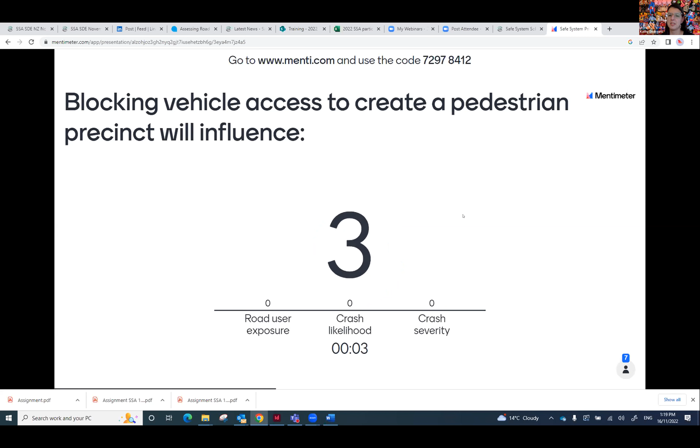Again the majority got that one. All right, we're just going to keep powering through - question 3. Blocking vehicle access to create a pedestrian precinct will influence - is it road user exposure, crash likelihood, or crash severity? Exposure - good, good, looks like we've got our exposure, likelihood, severity sorted, Ken, which is good.

It's pleasing. The safe system speed for vulnerable road users, people who walk, cycle or motorcycle, is less than what?

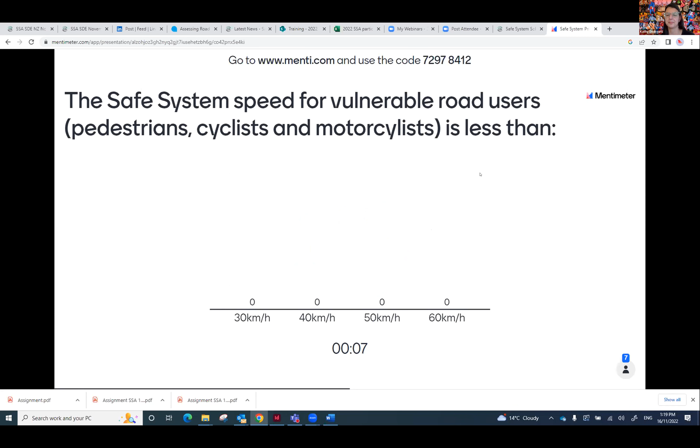Five considerations when evaluating the safety for motorcyclists include sight, surface, signs, strike, and which other S? Very good, very good, that is correct.

Last question, so this is it. The speed environment influences a crash's - is it likelihood, severity, exposure, likelihood and severity, or exposure, likelihood and severity? Good question. Interesting - severity, was it a trick question? Maybe it was a trick question.

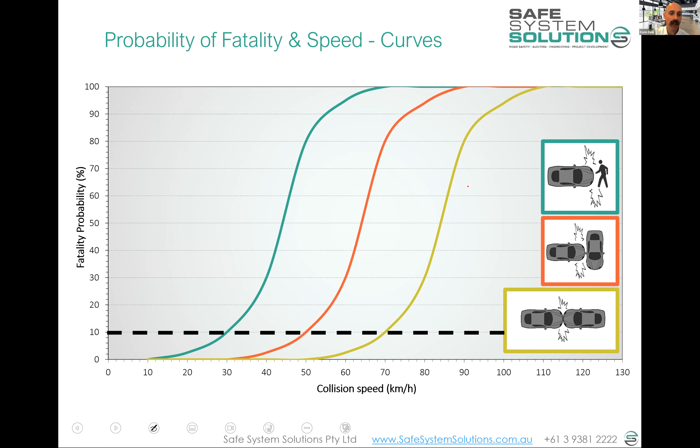I showed this to all the groups. With some I dwelled on it a little, and with others I moved past it, saying we'll cover this off in module 4 when you get into safe system assessing. That's now, so we'd better cover it.

So what we've got here is this idea that we've got a vehicle's speed, and then all these different crash types that could happen. They're going to be more or less severe depending on the speed and which crash type it is. In the safe system assessment, we need to give it a score between 0 and 4.

So we can start to think: if a car hits a cyclist at 40 kilometers per hour — it's a different color there because I'm going red onto red — we know we're in a fairly serious range, and a score of around 3 is applicable. If it happens at 80 kilometers per hour, we know that's very much in the 4, very bad category. If it happens at around 20, we're in a much better position — not absolutely free of risk, but much better. You can see that for a number of crash types.

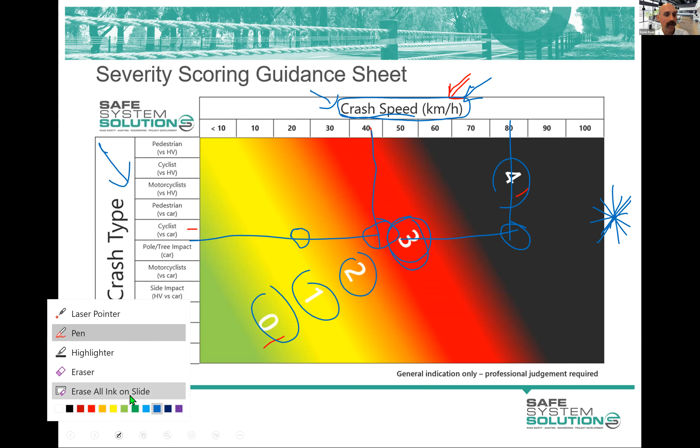Kathy asks: are we looking at cyclist speed or car speed? Great question. So this is all based on the car speed, or the speed of the bullet vehicle, if that makes sense.

I don't think we've got anything in there where there'd be an odd bullet vehicle being the one that does the damage. It is the car speed in all of them, except for maybe head-ons when we're getting heavy vehicles versus cars - you've got to sort of do a delta V on that, so it depends on mass and the vehicle going back. But generally you're talking about operating speeds of the road for vehicles.

Good question, thank you. Give a prize to that person. I don't know. Okay.

So I think I can just dive straight into showing you how to do a safe system assessment. And like anything in life, isn't it, the best way to learn how to do it is to get out and have a go at one, and then see where you don't understand things, ask questions, and have a go at it. But I'll walk you through, and then we'll give you all the info you need.

Kathy, we did have a little poll, or we may not have a poll. I'm not sure. No poll. That's okay, no polls. Sorry about that. That's okay.

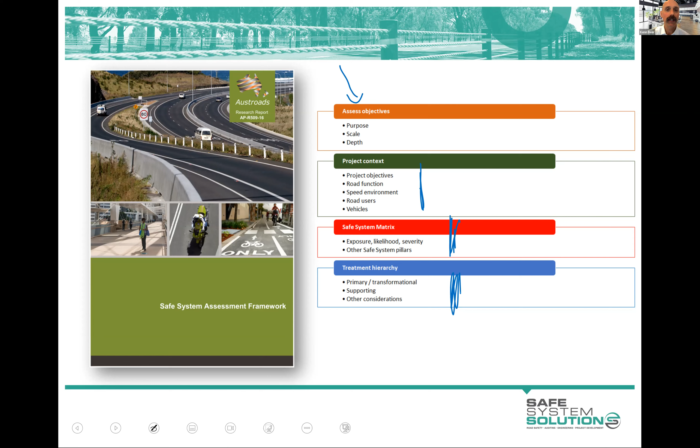So the two jurisdictions, South Australia and Victoria, put out supplementary guidelines that sit under the Austroads document, clarified a few things - it just didn't quite work in practice. They also set some requirements in those states for doing safe system assessments. That's now in your road safety plan, the requirement for safe system assessments to be done on infrastructure projects. So it's very much a genuine assessment technique that is used for infrastructure designs, development, planning of projects.

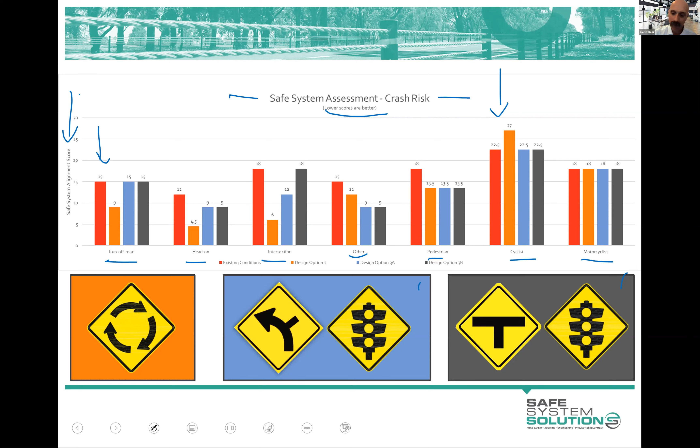So how do we get ourselves to this point? And that's what I'm going to spend the next bit of time going through. Well, first and foremost, you want to understand aspects of the project, which are going to help inform your scoring.

And Austroads put into the Safe System Assessment Framework these prompt questions. So if you're doing a safe system assessment, you start with these and you ask whoever the project team is - the designer or the project manager or whoever - you ask these questions around, well, why is this project happening? Are there specific issues that are being addressed? What's the traffic growth? Is it freight area?

Then you get into, well, what is the function of the road? What's the land use, speed limits, intersections that are going to stay, that exist, what's happening upstream, downstream. You could ask other questions to gain this context of what's going on. You'd be looking at movement and place assessments if they've been done, or understanding what the aspirations are of the area.

What's the speed environment? More questions around speed. What road users are present, or what road users are expected to be present - we've got elderly or children or the like - and what is the vehicle composition? We've got lots of heavy vehicles or motorcyclists or others.

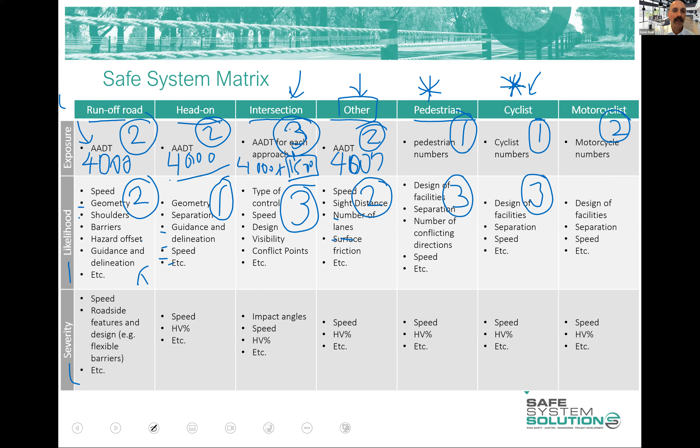And it's often the same for cyclists. They've got that sealed shoulder to work with, but there's no other facilities. Motorcyclists tend to be affected by all these different things within the others, and they're smaller and easier to miss by motorists at intersections, so they often end up becoming quite a highly scoring one.

So there we go, we've got now some scores for likelihood. Of course, if you're doing this properly, which you will be shortly, you're going to have to dot point some of the things I've been talking about before you get to actually putting a score down, to somewhat justify your score. Now, we do have a scoring reference sheet, a scoring fact sheet on likelihood, because it's a bit of a tricky one. You kind of have to think about it as relative likelihood - this intersection compared to other intersections, what are the characteristics that make it worse or better?

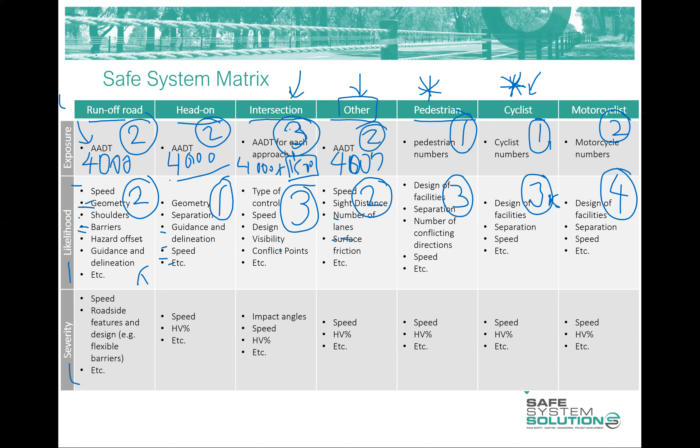Okay, let's get back into it. So we've now got scores down for exposure and for likelihood, and we've justified our likelihood scores with lots of dot points about what the physical infrastructure is and what's missing and all of those sorts of things. Then we go to severity - we say, okay, now put aside the chance of a crash and how many people are exposed to it, we're assuming a crash is now happening - how bad is it going to be?

What's the severity here? We say, okay, a vehicle is going to leave the road and it's going to hit something - what speed is that happening? That's going to be a big influence. What are the roadside features? Is it going to hit a barrier system? That's a crash.

So, is it going to be a flexible barrier? Is it going to be a rigid barrier? Are they going to hit a pole, a tree, or a culvert, or are they just going to roll over in the roadside? They're all going to have less severe outcomes.

And so this is where we look at, well, what are we saying for the severity of crashes? Let's go up to 4 again. I start at 4: should a crash occur, it is highly likely that it will result in a fatality or serious injury to any road user involved.

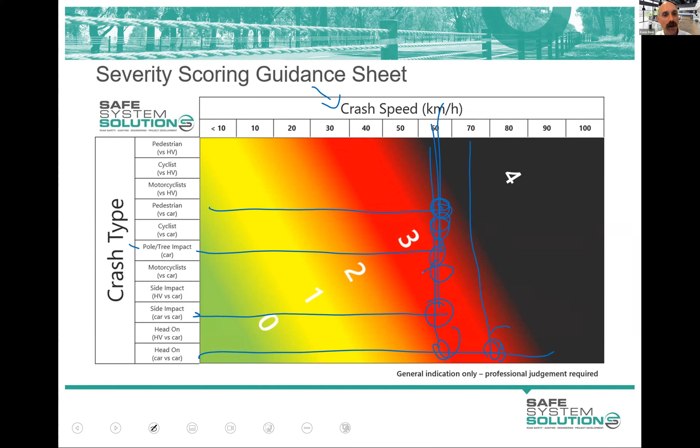And again, you're just using your judgment on these. Go to 3 on that.

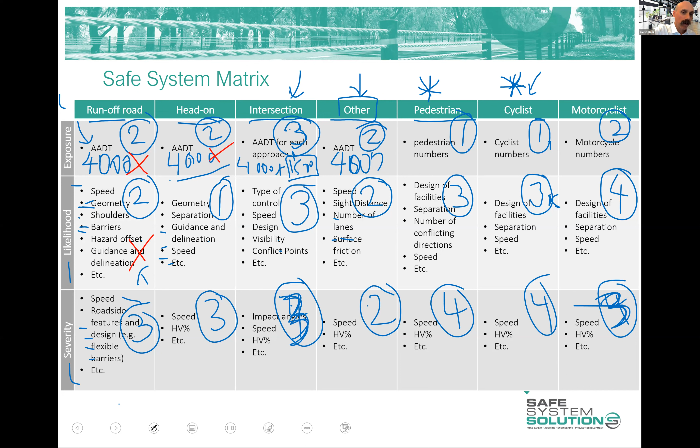Okay, so you've got to this point where you've put all these numbers in, and now you're going to take those numbers and multiply them. So you multiply down, right? So we've got 12, and then we've got 6 and 27. And you can see there, you're immediately starting to see where your risk comes out. What are we at?

Okay, so that immediately helps you. What you want to do is get a total score, so you add these up and you get a total score out of 448. Okay, Kathy, I'll pause there and see if there's any questions.

Yeah, I think Blair might have his hand up. Thanks, I thought it would be easier to verbally articulate what I was trying to ask rather than type a question. When you're looking at the heavy vehicle percentage, you predominantly use speed to pick your numbers on that severity. For instance, that pedestrian one was borderline 3 or 4, but if you have an awareness that this is used more by heavy vehicles, or there's other influence that would tip you into a 4, is that how you would use that approach? Absolutely, yep.

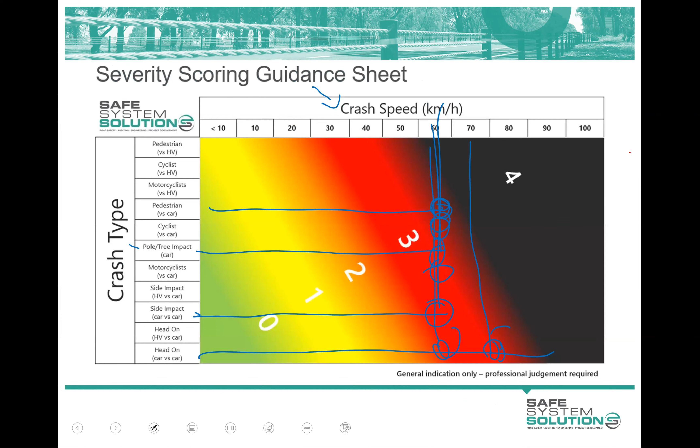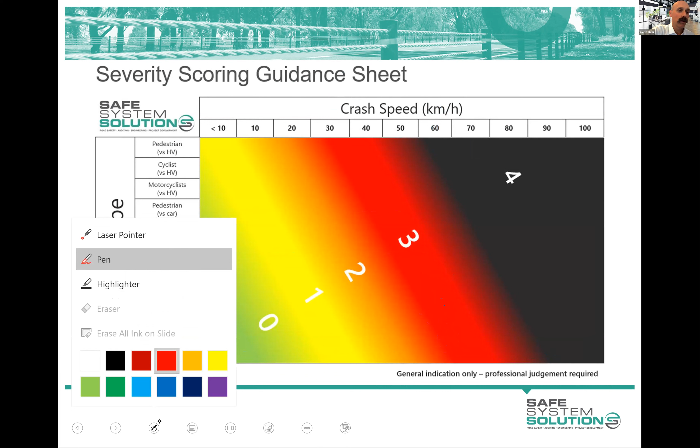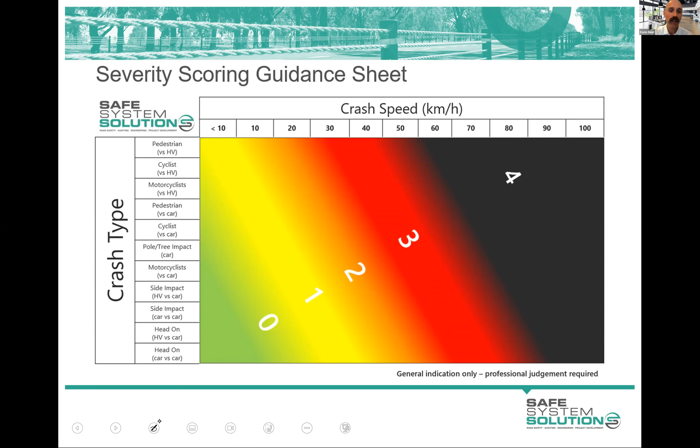If you can't quite decide, is it a 2 or a 3? Can you go 2.5? So Austroads is silent on that. In the development of that guide, in one of the workshops, I said we're going to put numbers to this. There's an important aspect to putting numbers to this: in normal risk assessments, we don't really quantify it like this, we just say it's high, it's probable, it's severe injury, and it gives high risk. But this one we put numbers to.

And the reason for that is something I haven't dwelled on, which is a 0. If you put a 0 into any cell of this matrix, what does multiplying anything by 0 come out as? It comes out as 0, of course. So if you have 0 exposure, there are no intersections, it doesn't matter what the likelihood of an intersection crash is or the severity - there's no intersection, it's pointless. Likewise, if you could hand on heart say nobody will crash at this intersection - well, you wouldn't do that, because you've got to take into account human failures and the like. But in theory, if you could be very confident, you wouldn't care about the exposure or severity, because no crashes will happen.

Likewise, if we can say that if a crash occurs at this intersection, passenger vehicle to passenger vehicle speeds are going to be low enough that they won't seriously injure or kill anybody, and you put a 0 there, you don't care what the likelihood or exposure is, because everybody who crashes is going to walk away. Now, put a disclaimer on that, because if you've got a 4 and a 4 and a 0, you've probably got lots of minor little bingles going on, and you probably want to fix that. But that's not really a safe system thing, because we acknowledge crashes are going to happen.

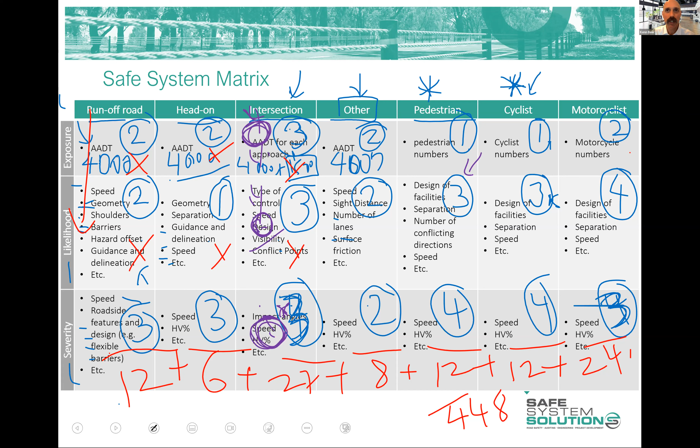But in practice, there is a lot of debate between some of these numbers. The Victorian guidance and the South Australian guidance, which is pretty much what's used now across Australia, says that you can, if you really want to, go to a 0.5, but it's discouraged, but you can.

All right, Ken, now you took 15 minutes to tell us yes, but that's okay. It needed the explanation. Thank you.

In the team, should it be multidisciplinary, traffic design, environment, etc.? It'd be lovely if you're able to do that. That's wonderful. That can be very helpful. You can get insight. That's good.

Does the framework include a differently focused matrix for non-road based assessment, cycleways for example? Oh no, you would use the same matrix. You would probably put zeros for quite a few of them. You could use the same thing. So I have done this once just to try it, recreated a new framework under the same structure of thinking for a dedicated cycleway.

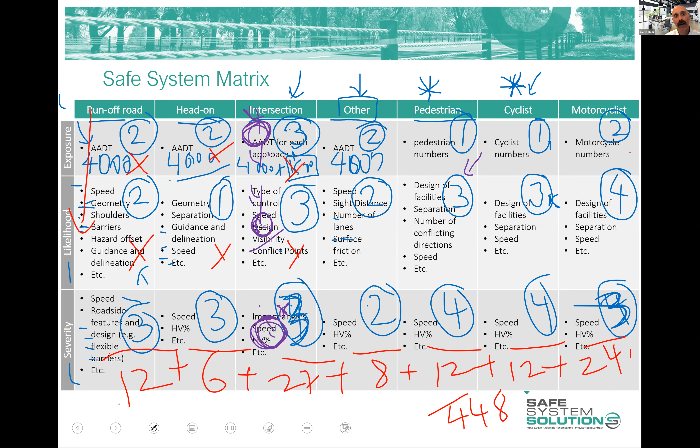So it uses the same philosophy, but you just have to then go, well, this is run-off-road for cyclists, this is head-ons for cyclists to cyclists, or cyclists to pedestrians. No, you wouldn't. You just do cyclist to cyclist, and then okay, we've got intersecting paths, and then that's pedestrians being struck by cyclists, and cyclists. Well, that can go because that's not relevant anymore because we're covering the whole thing as cyclists. So you can do that if you want. It's probably worth getting somebody who's done a lot of safe system assessing to review your methodology and how you're thinking about it. But it is, in essence, just a risk assessment framework with a particular tweak and adjustment to make it safe system-y thinking.

System-y, I love it.

If the crash severity is 0, so only minimal chance it will result in fatality or serious injury, it seems that it would easily rule out a lot at low speeds. Yeah, it's a pretty good reason to have low speeds. So yes, good, okay, great.

Carry on. Now we've got half an hour to go. And you need time to show them through stuff. So put your seatbelt on. We're going.

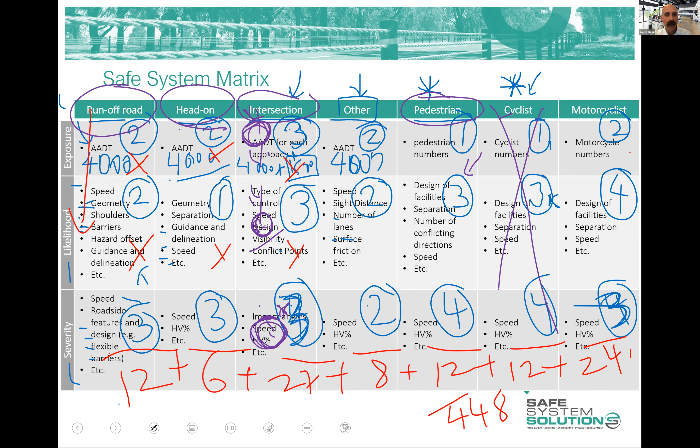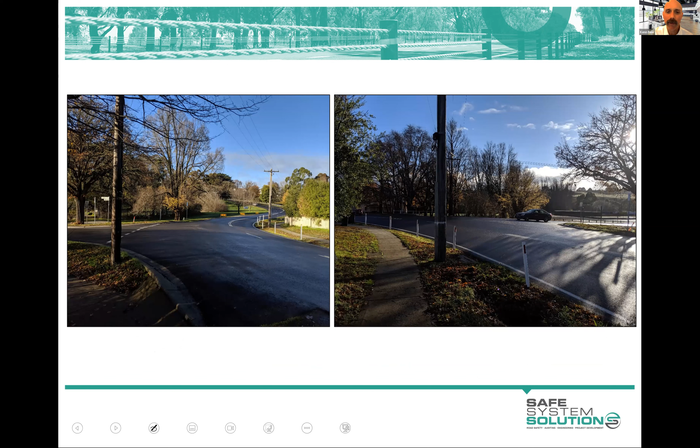Okay, so just a quick example. Here's an intersection. They've got some designs to upgrade this intersection. You've been asked to do a safe system assessment on it. You go out, you're looking at the existing conditions. You say, oh okay, there you go. It's give-way controlled, it's got a power pole, it's got footpath. You get an idea of that, and you go, okay.

They've got an idea, and they want to put a roundabout there, and they're giving you this design, and they say, here's one option we've got, and this is how the roundabout would look. Here's another option we've got, which is a modified T intersection with traffic signals. And this is the third option we've got, a conventional T intersection with traffic signals and some slip lanes and the like.

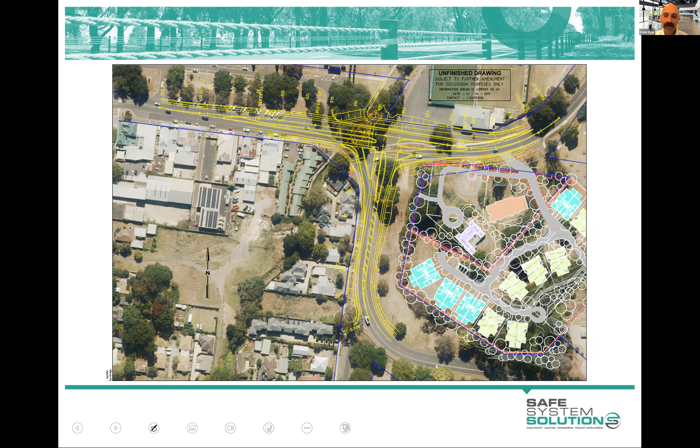And you do this for each, putting in what increases, what decreases, dot, dot, dot, dot. You go through, you fill it out. This is your existing conditions.

Then once you've completed all that and you're happy with it, saying okay this is good, that was easy, you copy the whole table, the whole matrix. You paste it, look at the design of the roundabout, and then you modify the existing condition by crossing out things that have been removed and adding things that are new.

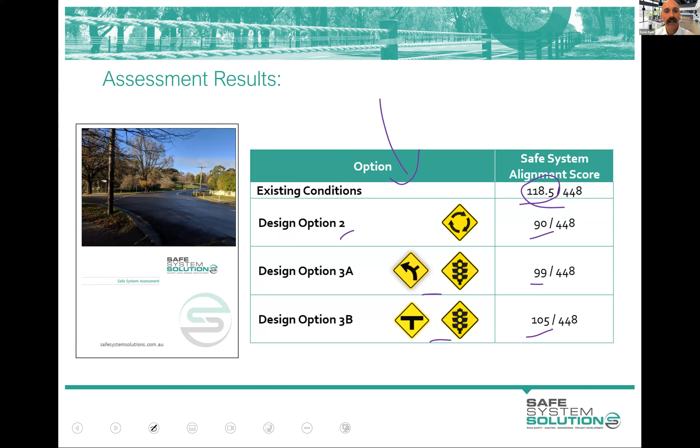The modified T signalized gives 99. The T intersection gives 105. So that basically says that by doing any of those 3 options they put forward, they're improving their alignment with safe system principles. I didn't get to zero, so there's more that could be done, but there is an improvement. You'd expect that, since they're investing in intersection controls and features.

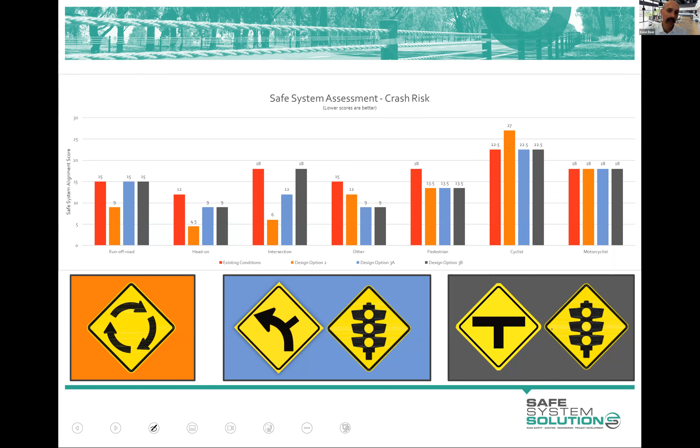But then what people want to see—this is what the project control groups, project management review, and people asking 'have you done a safe system assessment'—they want a look at the outputs. They want to see this sort of thing, and that's how we've arrived at these scores. Kathy will show you, we've set up an Excel so this sort of output is produced for you. You'll still have to do the thinking, but at least the graph will be made easy.

But then, as I said, for each of those we can further improve their alignment with safe system principles, and we make these recommendations. We say, hey, we like your roundabout idea, but here are some ideas that will make it even better. Or we like your signals idea, but here are things that could make it even better. And we categorize these ideas into either primary or supporting.

A primary treatment—don't think about that as my number one, think about these two as buckets, I'm going to draw a little handle on them. I'm going to take a treatment out of the primary bucket, and that could be raised crossing points at the roundabout, a separated bike facility around the roundabout, slowing speeds on the approach to the roundabout—it could be any of these things.

It's planning, design, and management considerations that virtually eliminate potential for fatal or serious injury occurring in association with foreseeable crash types, or that crash type you're thinking about. So really for these, you're going to still have to assume crashes are going to happen, unless you're grade separating or completely moving vulnerable road users off into a different area. But it's got to either completely address exposure or severity.

I will just say that you're going to be asked to go to a site. You're going to be given a design, and you're going to go to that site and look at it, because you're going to do an assessment of the existing conditions. Then you're going to have a design and look at that, imagine it built on that site, and then assess that. We need you wearing a high-vis vest when you're out there, and we don't want you to measure lane widths or anything like that. You're just observing the area.

How does it function? We've risk assessed them all. They're all low risk in the sense that you're able to stand away from traffic and look and park safely, and not be a hazard yourself. Don't make people walk around you.

We do have a safe work method statement in the learning management system for you to just click that you agree to. It's pretty simple. It says you won't be drunk when you're out there, and that you understand you've got to try to act safely, and that we've assessed the site and those sorts of things.

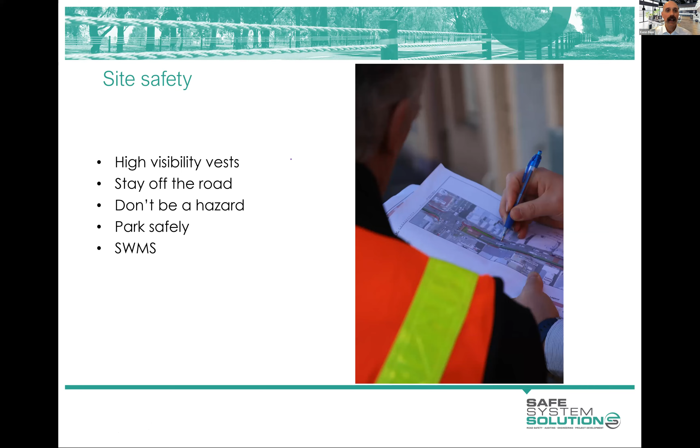I think that's it, Kathy. I was a bit fast at the end there, but I did want lots of time for you to walk people through this and then for us to answer any questions that come up.

Yeah, definitely. Okay, great. So now is your chance for questions, and I will just show where you go in the system. Hold on. Okay.

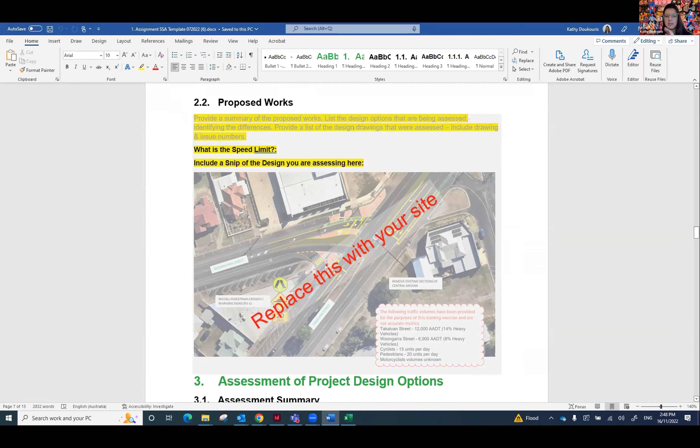And the first bit you've got to do is tell us a little bit about the proposed work. So your design is telling you what the proposed work is going to be on that site. Take a snip of it and pop it in here, replacing this picture with your one, and also tell us what the speed limit is. We don't need a big long paragraph here, just a couple of sentences saying they're proposing a roundabout here or something.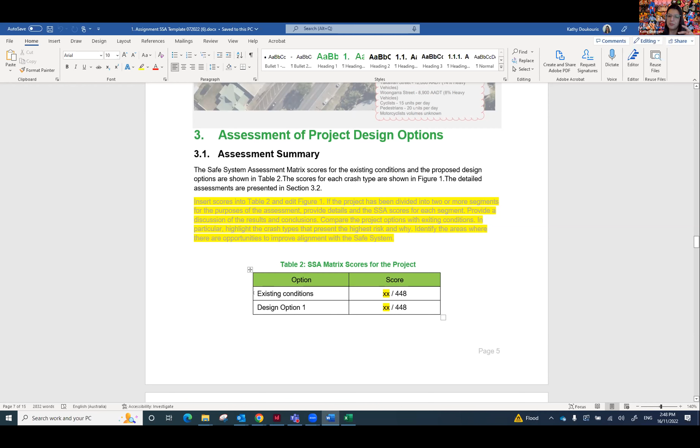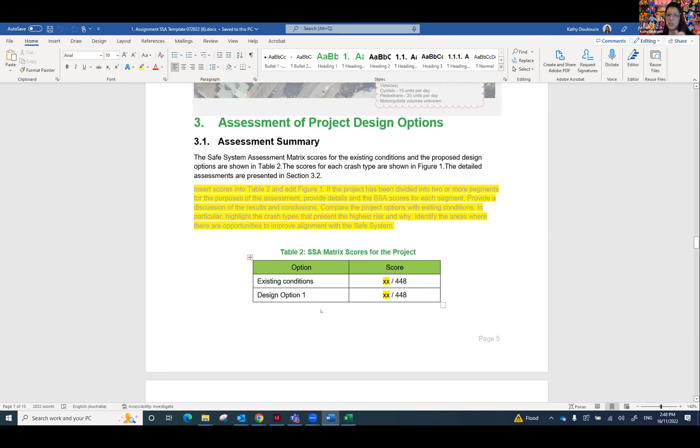This section here you'll actually complete at the end once you've done your scores. It's a bit of a summary, and you're doing a total of 2 matrices. The first one is on the existing conditions, which is what you go out and do your site visit on. Then the next one is on that design option we've given you in the folder. You replace this graph with the one you've made in Excel.

And here we get to the juicy bit. This is your first matrix, and what you do is insert option here. For the first one, you write in existing conditions, and you start to complete this matrix for the existing conditions. The exposure is all about the numbers.

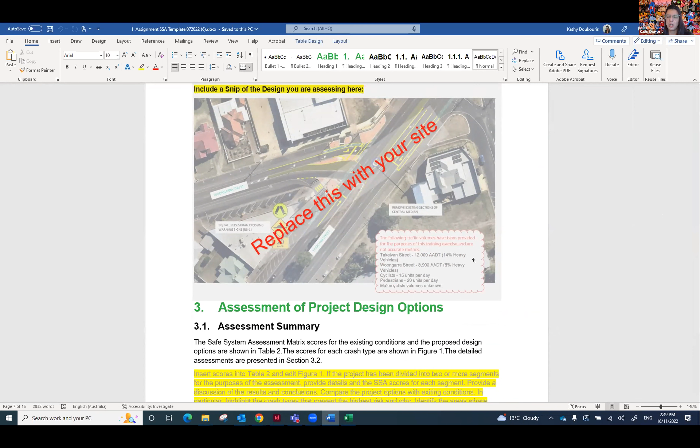In your design option, we've given you some traffic volumes that this really is for training purposes only. In some cases we've made up designs or something like that, so if they don't quite align with what you know of the local area, that's okay. Use this as a training exercise. So your numbers are in here.

That is what is going to tell you about your exposure, comments, and scores. So you complete that, then you have a look at what factors increase the likelihood of crashes and what factors decrease the likelihood, based on the existing conditions, as it is at the moment. You score each of those as well, just for the existing. I know the design is highlighted there, which is for the next bit, but just the existing part.

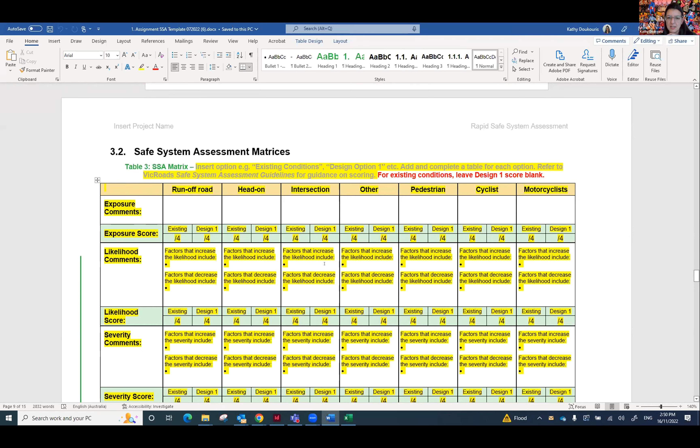Then you look at severity and the same again. What factors increase severity and what factors decrease severity, and you score that across the board. You multiply it down to get a score here, and then you add these scores across to get your existing conditions score out of 448.

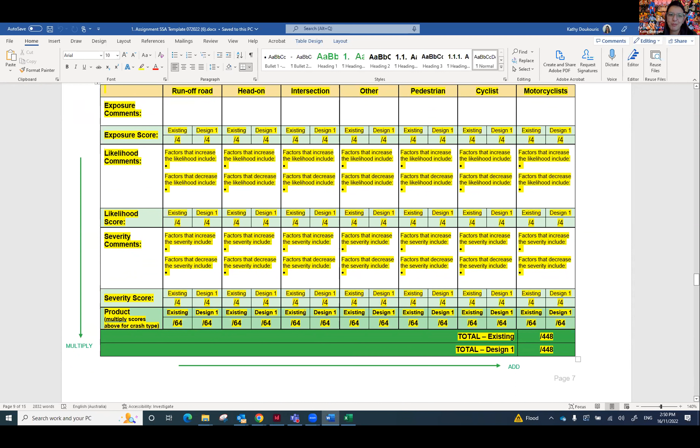Multiply down, add across. We all good, Ken, so far? Yeah, is everybody else good? Questions if you've got them. So you've completed your existing conditions one. Happy days. Oh good, okay, thumbs up.

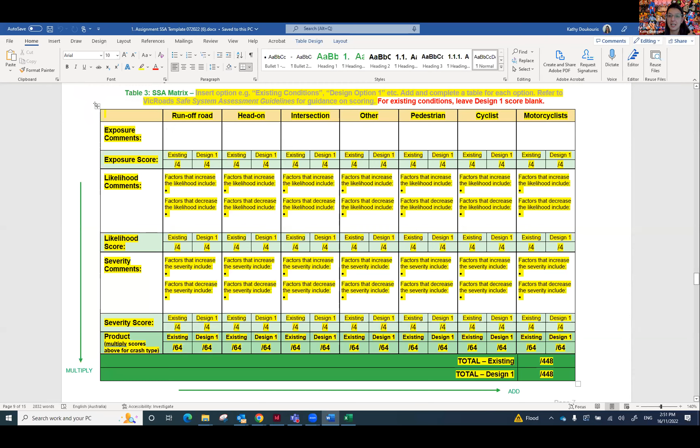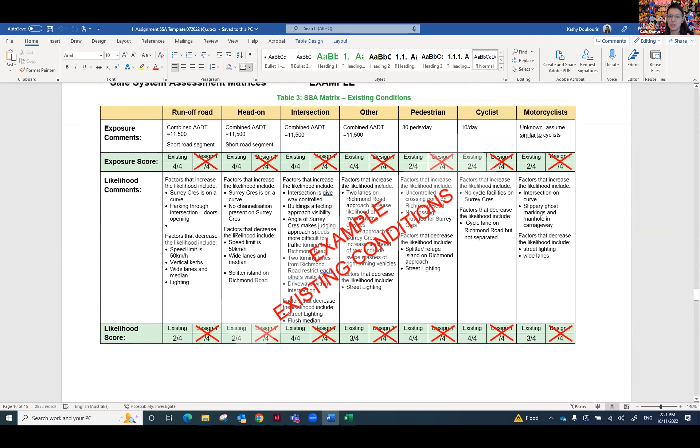You then copy that table. Good news, here's an example right next to it. So if you get stuck, have a look at your example. It's clearly marked as an example. Just cross-check with that if you need to. Okay, so you should get your score in there for your existing conditions.

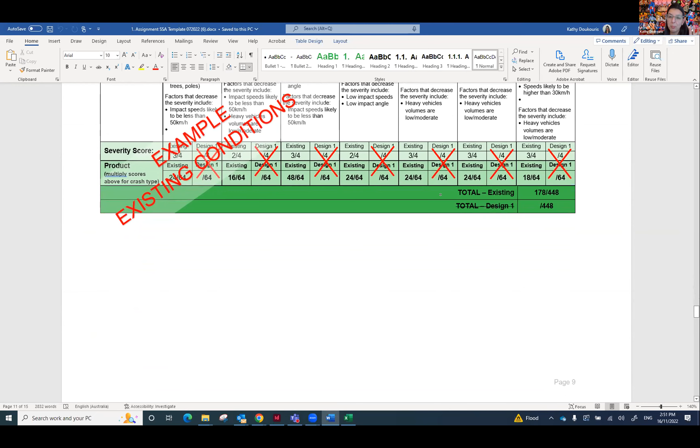You copy your existing conditions table, and then you write proposed design option 1 where it said existing conditions. Copy, paste, design option 1. This one's traffic signals.

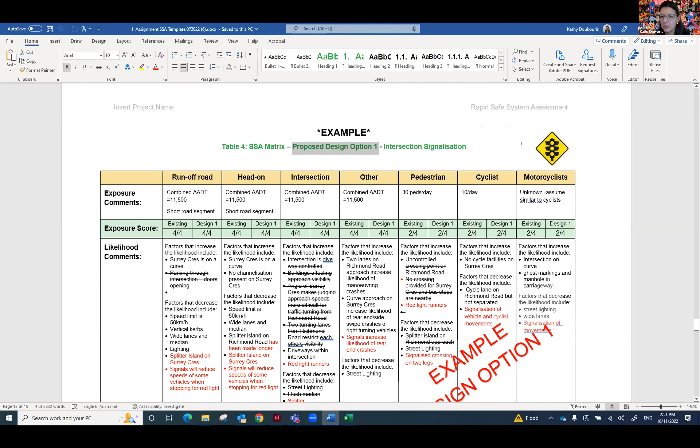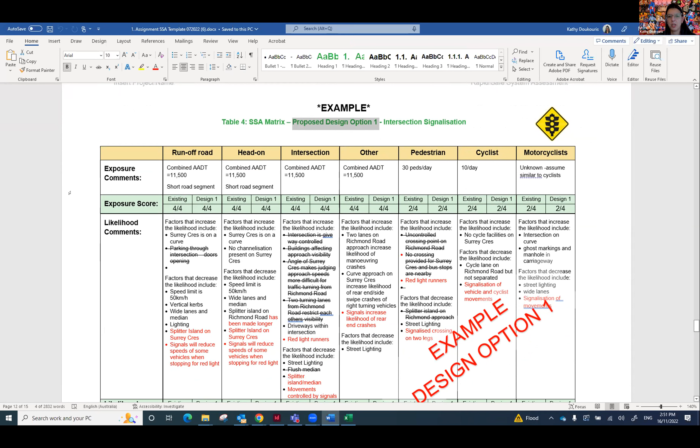Now, chances are in this example here, your exposure score hasn't changed because the numbers haven't changed. I'm assuming if we don't close something or something like that, the numbers don't change, so that's nice and easy done. But your likelihood has probably changed. So as Ken mentioned, you cross things out that no longer apply with the design option, and then you add anything new in here that now will apply with your design option.

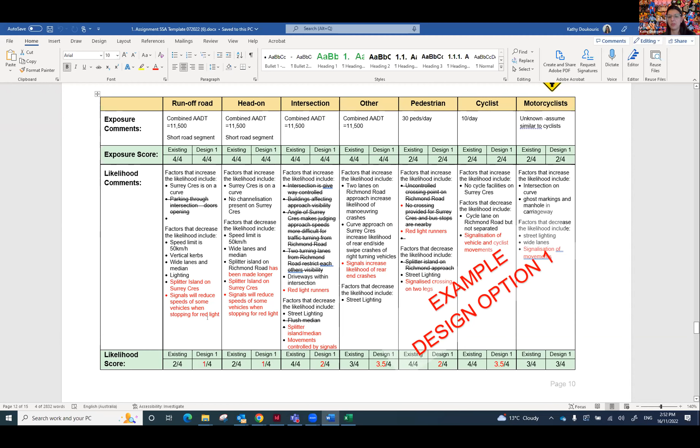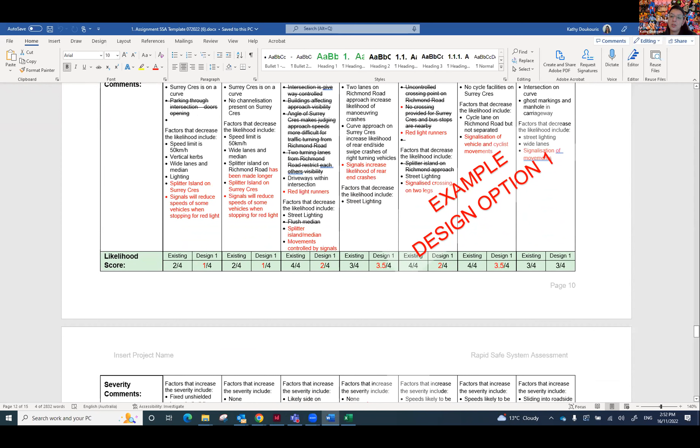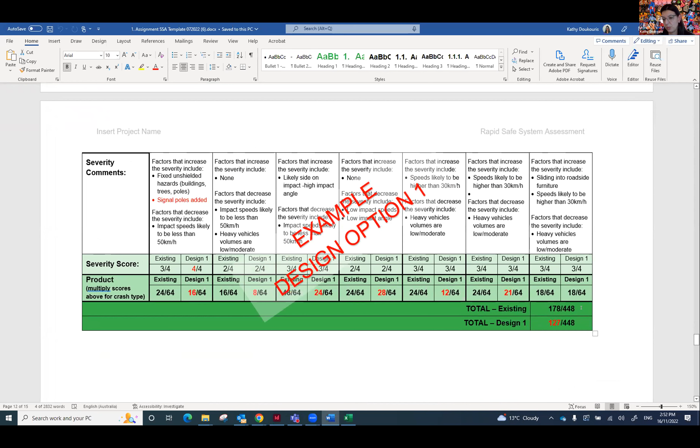Crossing things out and adding things new in red, so it's nice and easy for the reader of the report to see what's changed and what's new. And you score your design option in there. Got an example, same again, multiply down, add across, and then you've got your new score - your design option score. That's the good stuff.

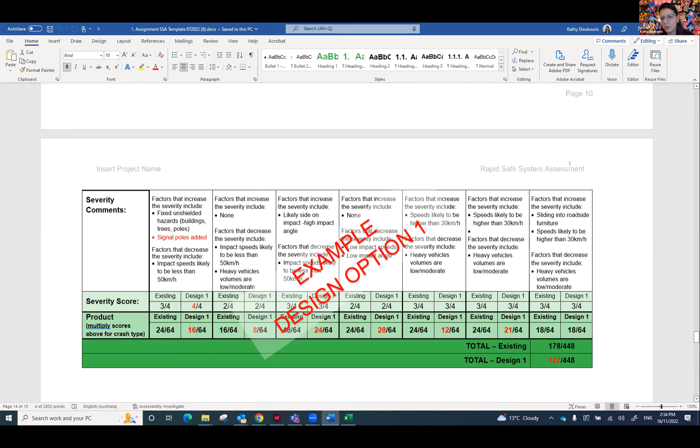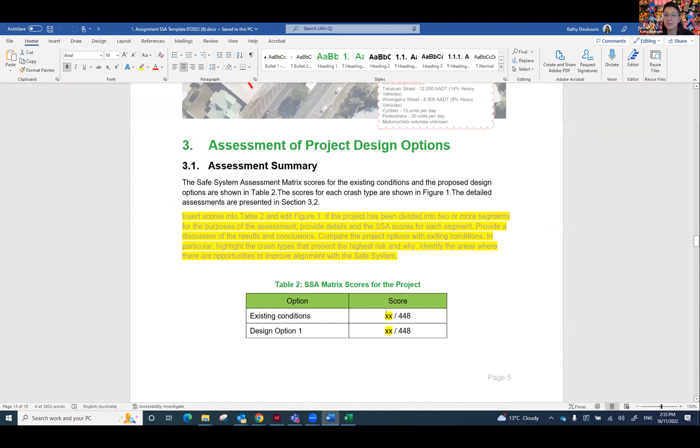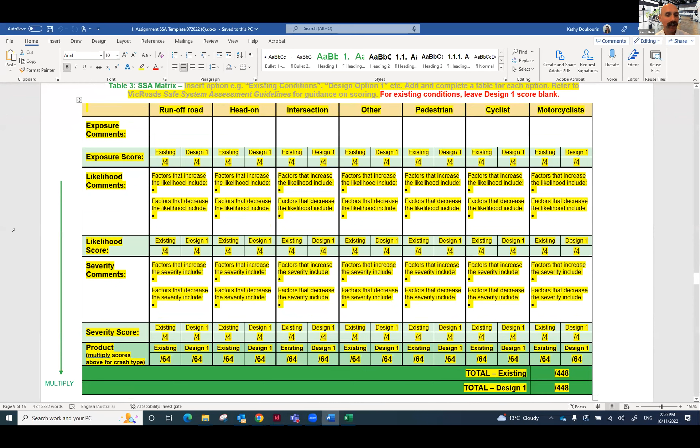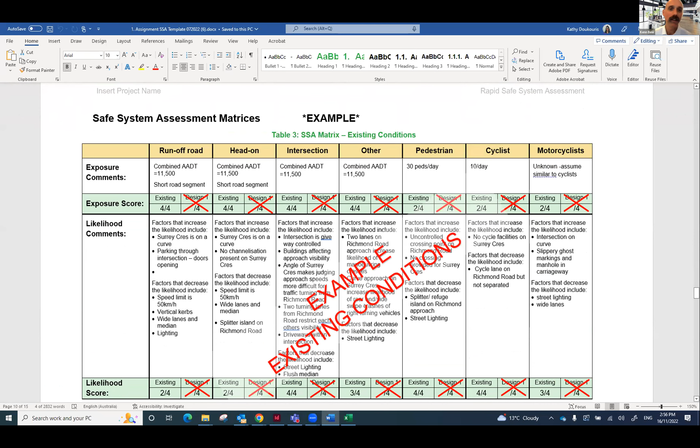Good, too easy? Yeah. So just a couple of things I want to reiterate there. You fill out the existing conditions matrix, you copy it, you paste it. So what's in there at the moment are examples only, so you're not going to use those examples. Don't use those, delete them or get rid of those. Copy the existing conditions one, paste it, and then modify it. So after you've filled it out, copy.

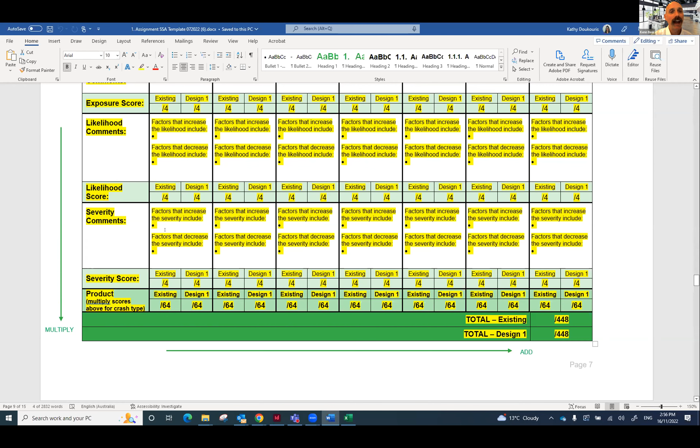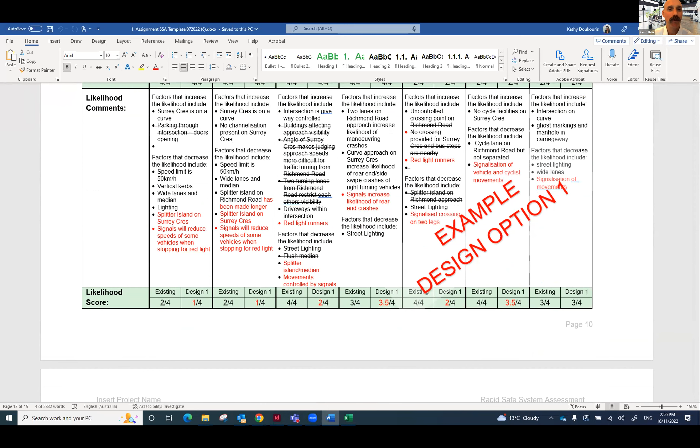The next one, and I'm just reeling through things here that people lose marks for. The next thing is that supporting treatments, primary treatments - that is for alterations to the design. Existing conditions, don't think about that. Think, what is this design? What could we change about it that would make it better? And write those in, and those can be supporting or primary.

They're two big ones there. So this is going to actually be marked, and what we require is an 80% or above for you to successfully complete this. And, you know, because we will, at the end of this, give you a safe system assessment certificate, but you need to prove to us that you understand this concept and how it works and the like.

So you're going to create that document, you're going to PDF it, and then you're going to upload it. And there's an upload button usually there, but it's not there for some reason, because Kathy's the super user or whatever. And you've got 2 weeks, so we will meet again next Wednesday at 1 p.m., or a little bit earlier for warm-up trivia. And that gives you an opportunity in the next week, hopefully, unless it floods or other exciting things that happen nowadays, to get out there and do your site visit on the existing conditions.

And once you get into this, once you start doing it, that's when the questions are going to come - how does this work, what do I do here, that sort of thing. And so next session, we've reserved some time for questions or comments or concerns. But also if you get stuck, if you go out to do this and you just go, no, I lost it all, please get in touch, send me an email or give us a call and we'll set up a 30-minute one-on-one session or something like that, just to run you through the bits and pieces that you might need some extra help with.